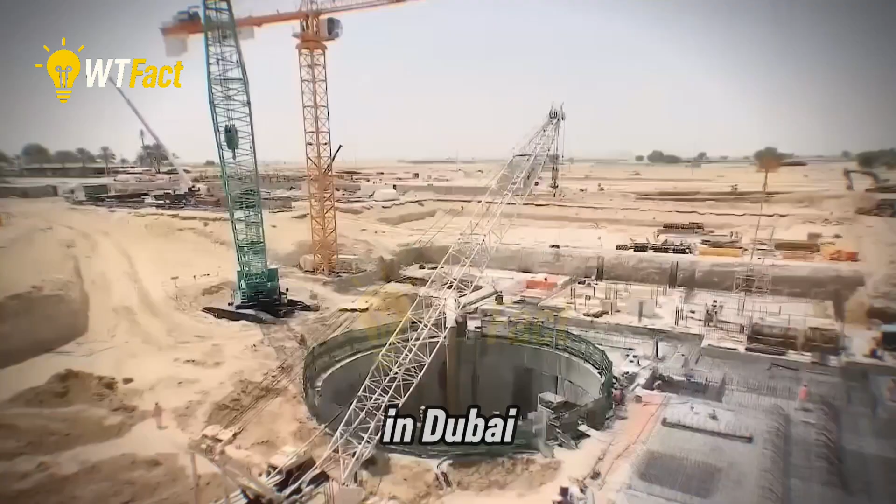During the construction of the world's deepest diving pool in Dubai, when a 45-meter tunnel was being dug into the ground, an unusual problem troubled the engineering team. It was discovered that in Poland, there is a diving pool called Deep Spot, which is open and has a depth of 45 meters.

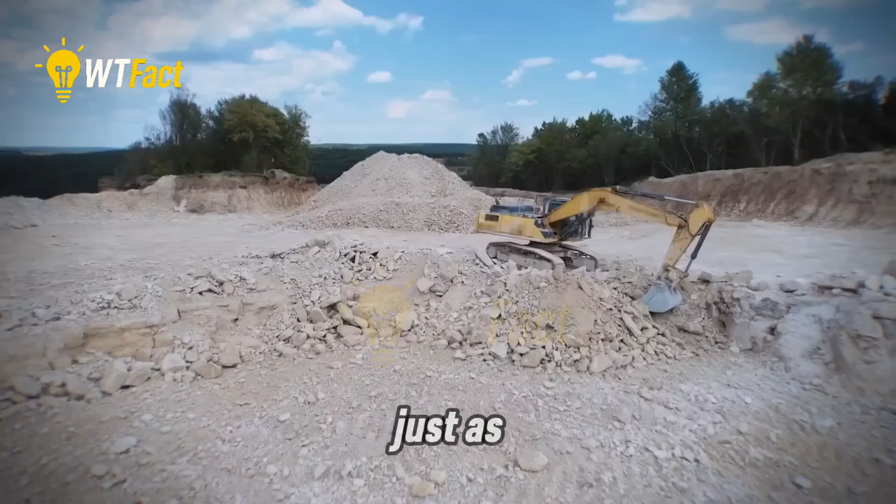Now it is clear that if Dubai wants the world record for the deepest pool, they need to go deeper. Although the project aims to increase its depth from 45 meters to 60 meters, this task presents significant challenges, making it just as difficult to perform as it might initially appear easy.

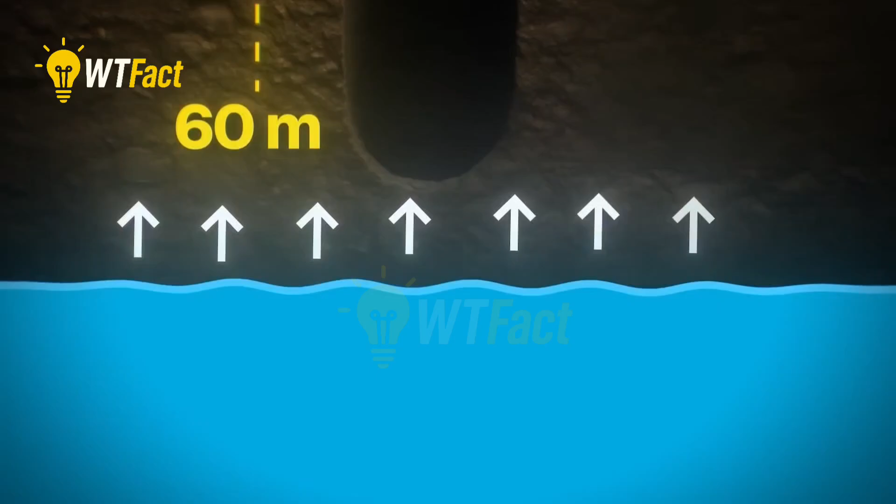Experts have calculated that if the pool's depth is increased to 60 meters, then groundwater pressure has the capability to effortlessly push it upwards. This phenomenon is similar to what happens when a fully filled water bottle is submerged and placed into a pond, causing it to rise.

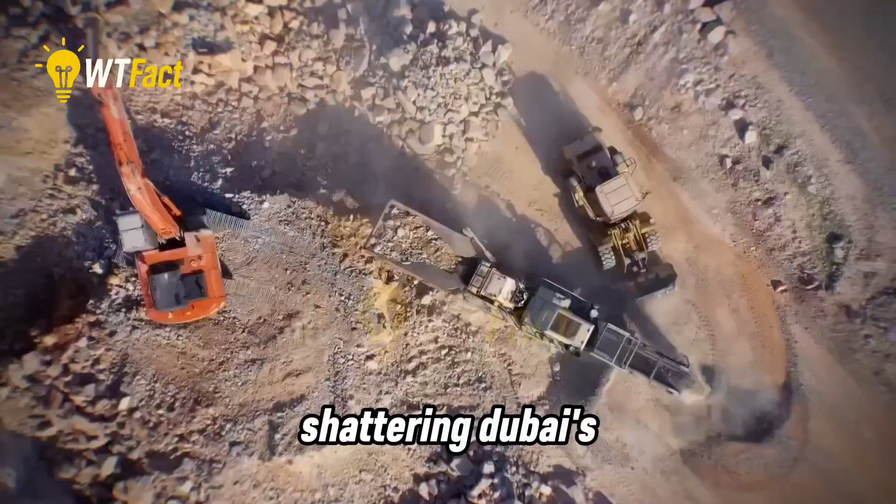The bottle will continue to stay on the pond surface because, as a result of the buoyancy force, the water in the pond exerts an upward push from the bottom, keeping it afloat, meaning the entire pool could rise above the ground at any time, shattering Dubai's dream of building the deepest pool at this point in the construction. But then an idea saved everything.

When it comes to setting world records, the first name that comes to mind is Dubai, with 425 Guinness World Records. It's still number one across the entire Middle East, and it feels like the rulers of Dubai do not want to lose this number at any cost. Another addition has been added to this world record library.

At the request of Dubai's Prince Sheikh Hamdan, the innovative underwater facility was conceived, and the world now recognizes it as Deep Dive Dubai, attracting divers from around the globe. Deep Dive Dubai is not just a pool but a bizarre and intriguing world with a depth of 197 feet or 60 meters. With this extraordinary depth, it is now considered to be the deepest pool in the world, containing approximately 14 million liters of water.

It is as much fluid as is typically found in 6 Olympic-sized swimming pools, or as used by approximately 90,000 individuals in the span of a single day. This elaborate swimming pool is intricately themed like a detailed sunken city, where skilled divers enjoy an immersive experience that was previously hard to even imagine.

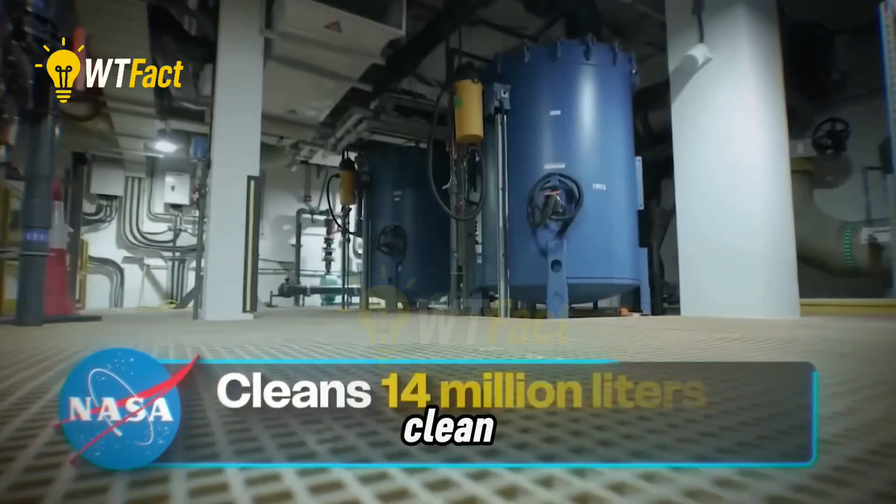With NASA's assistance, a system has been created to keep the pool water clean, which every 6 hours consistently and reliably cleans the entire 14 million liters of water. Whether the outside temperature is 50 degrees Celsius or 20 degrees, the pool water is always meticulously maintained at 30 degrees Celsius to guarantee maximum comfort for divers.

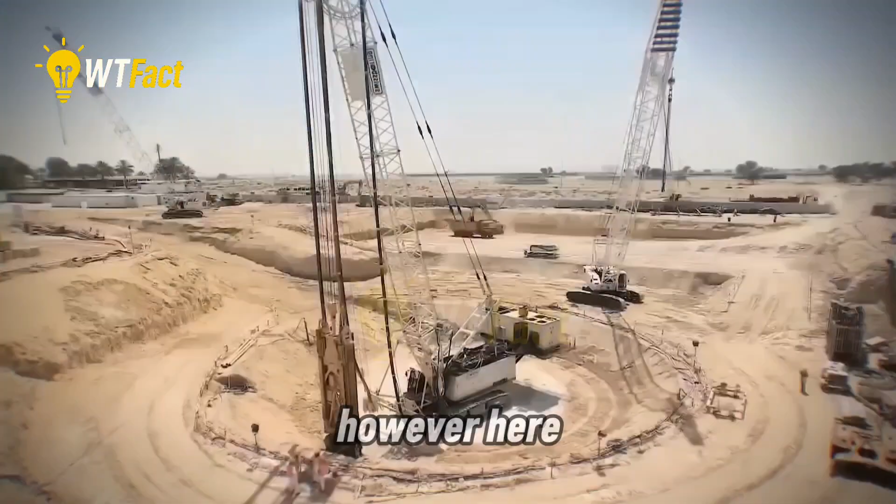However, here at Deep Dive, conditions vary slightly. People are more interested in its construction techniques than its contours, because the engineering community believes that Dubai's deepest pool is no less than a marvel of engineering. During the construction of Deep Dive Dubai, engineers faced various difficulties. Without wasting any time, let's take a detailed look at each of them.

The first major challenge was effective planning and design. Crown Prince Sheikh Hamdan expressed his strong desire for a unique and meaningful design that could effectively reflect a vivid glimpse of Dubai's deep-rooted cultural values.

Before oil and tourism, pearl diving was a major occupation in Dubai. Professional divers dove into the open sea without scuba gear. They diligently collected seashells to extract and subsequently sell beautiful pearls. A large part of Dubai's economy was previously highly dependent on pearl diving.

Keeping this idea in mind, Deep Dive was given the shape of a seashell, a shell that from afar looks like a gracefully curved marine structure, seamlessly combining aesthetic appeal with functional design elements. An open shell lies on the expansive seashore, revealing its intricate and captivating outer facade for all to see. Now the decision was how to build the world's deepest diving pool inside it.

Secondly, Dubai is a very hot city. In the event that the pool is constructed above ground within a building, the surrounding environmental heat could thoroughly envelop the pool's entire atmosphere. The Crown Prince of Dubai wanted to have a pool that not only has a distinctive design but also has a depth that the world would talk about. Thus, it was decided that the world's deepest diving pool would be excavated underground with a shaft in the ground.

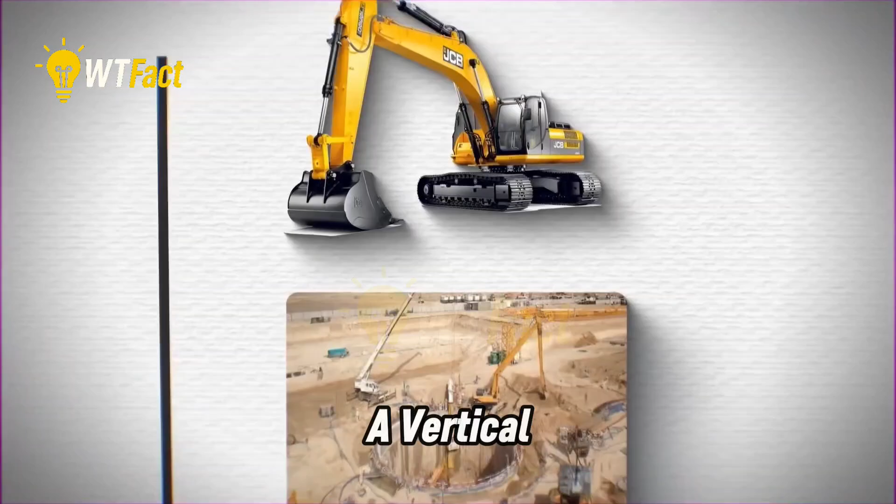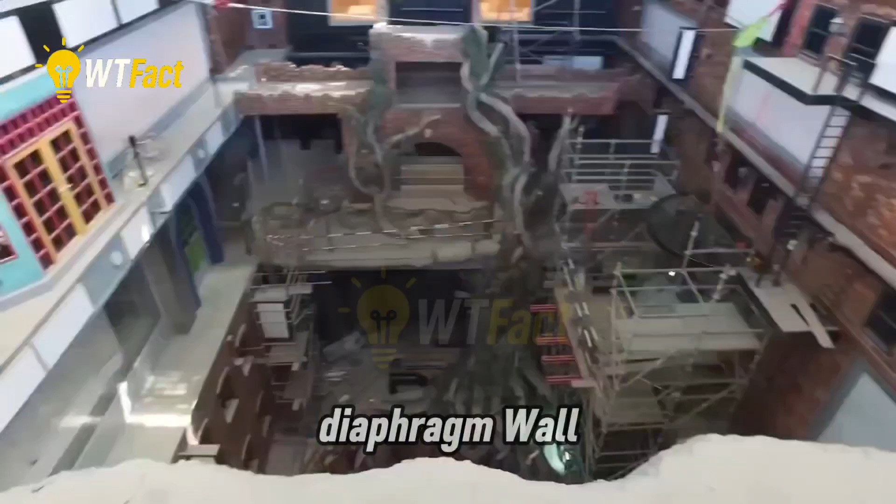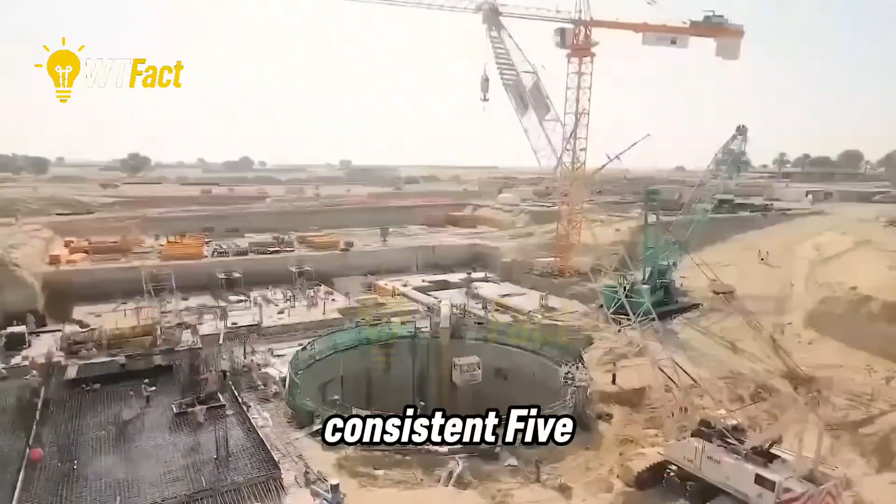A specialized excavator was procured to carry out this work. With the help of the machine, a vertical shaft as tall as a pillar was excavated to a depth of 147 feet. Then, a steel cage was inserted and filled with concrete. Using the same method, the entire diaphragm wall was constructed in small chunks. This entire process took more than 2 months. After that, the excavation work began. The original plan was to carefully excavate the area in consistent 5-meter increments, extending the process up to 45 meters below where the diaphragm wall exists.

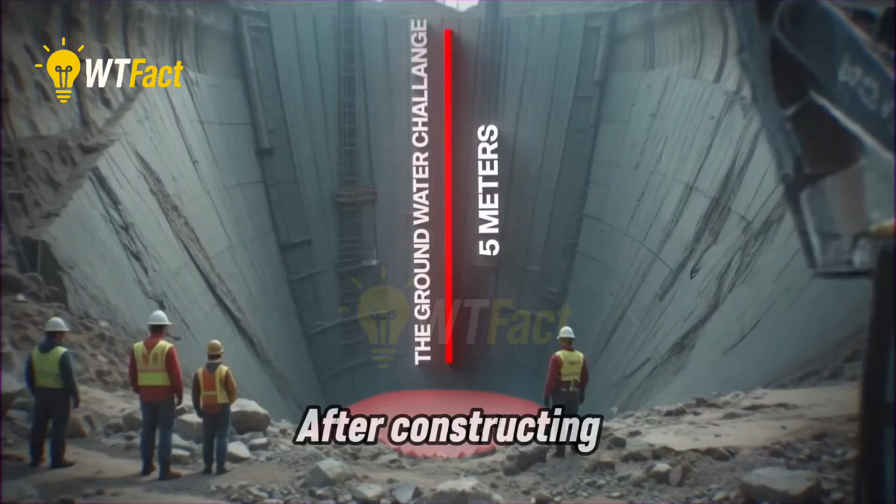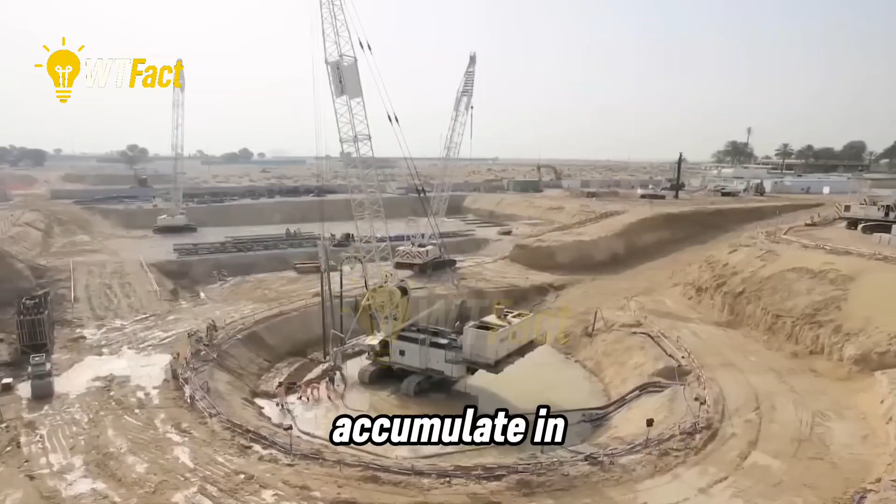However, once they had excavated the initial 5 meters, an entirely new and significant challenge awaited them: managing the persistent groundwater. After constructing the diaphragm wall, when excavation work began, after 5 meters, water started coming out from beneath the ground. Since the diaphragm wall was constructed in separate segments, small gaps were present within the structure as a result. And the groundwater easily flowed out from these gaps and began to accumulate in the middle of the tunnel. It was not possible to continue the excavation work without dealing with it. Pumps were installed to address this issue, which continuously removed water. And along with that, the excavation work continued.

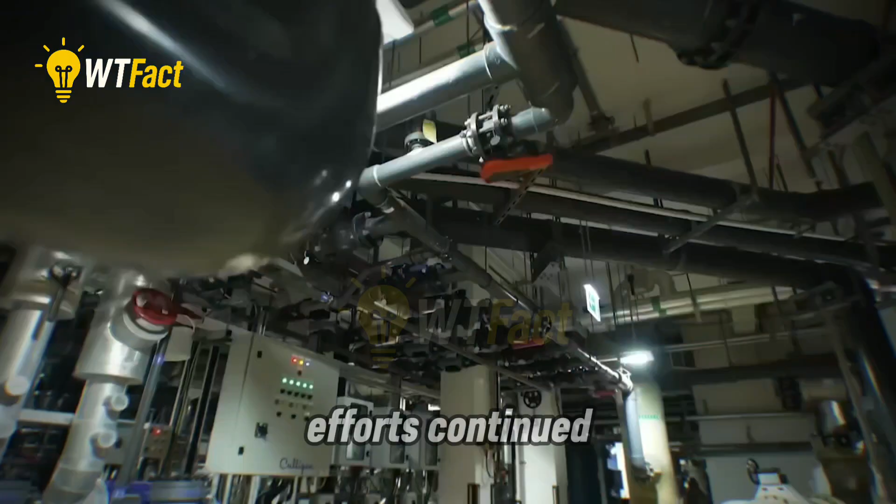Excavation proceeded for the next 2 years, and during this entire period, the pumps also kept running continuously. A total of 45,000 tons of soil, sand and stone debris was removed. After excavation, when the pumps were turned off, water started filling the tunnel again. In this situation, it was necessary to first make the diaphragm wall properly waterproofed. During the next several months, the diaphragm wall was waterproofed. The diaphragm wall, tunnel excavation, and ongoing measures to stop the groundwater took more than a total of 3 years.

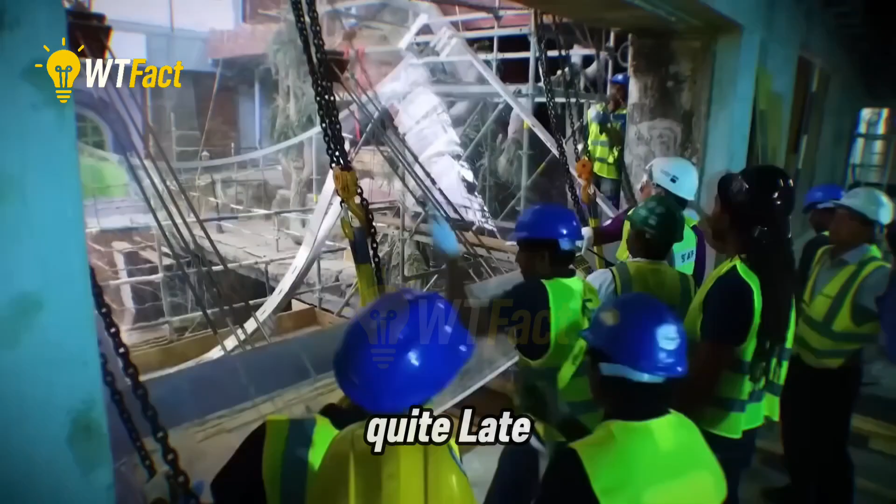Now the engineering team was already quite late. Every single day was incredibly precious, but during this challenging period, a new and unexpected problem arose in the construction process of the deep dive project, a significant change in design. When the diaphragm wall was completed, excavation was done and groundwater was managed, news came that near Warsaw, the capital of Poland, a deep diving pool named Deep Spot had been officially opened, and its maximum depth is 45 meters or 147 feet.

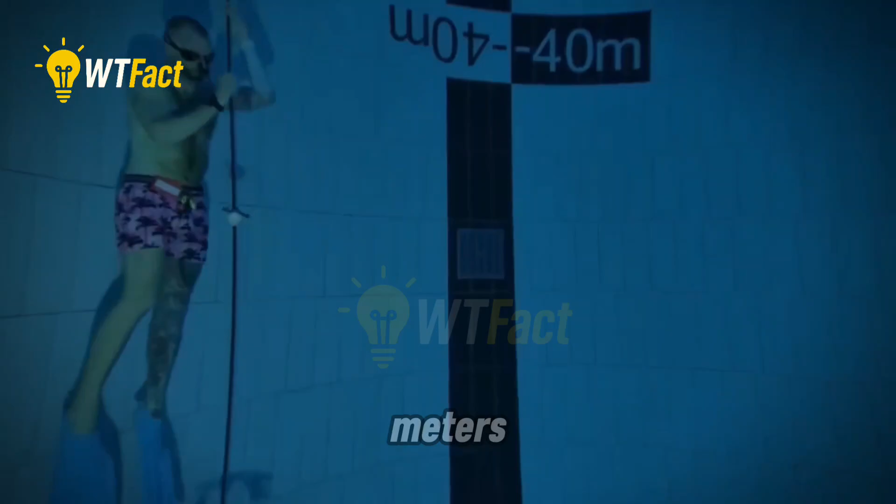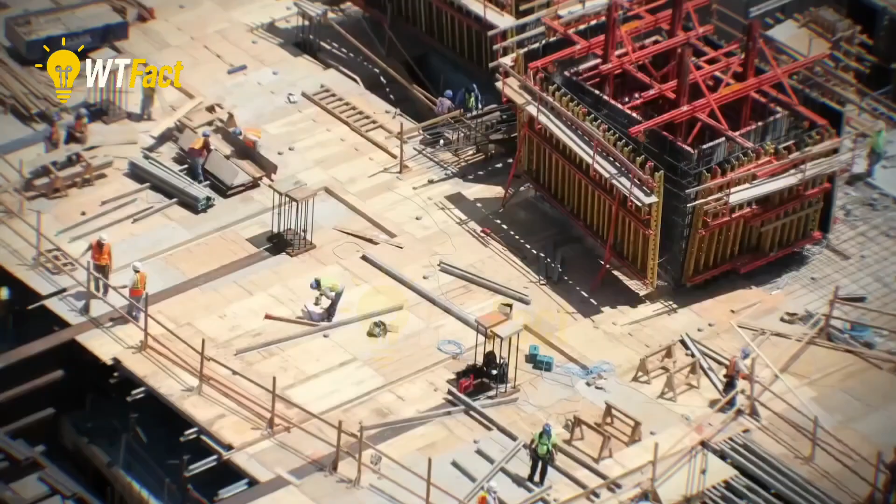This news struck the entire deep dive project team like lightning, because all the effort they had put in so far was undertaken solely to set a record. Normally, in all projects of this kind, most of the details are kept confidential, and something similar happened in this case.

When the Crown Prince of Dubai learned about it, he requested, "We are considering further increasing the depth of the deep dive so that a world record could still be easily set." However, there was a significant and unexpected problem that arose during the meticulous planning phase.

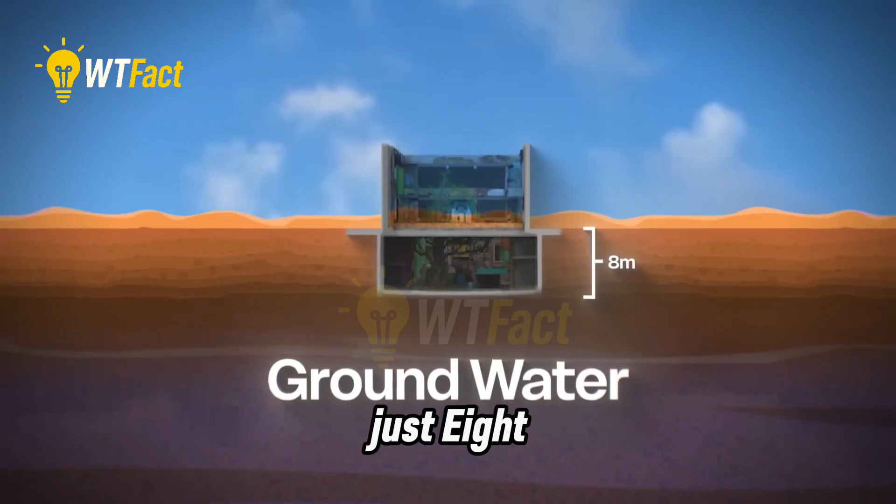Groundwater was present just 8 meters below the surface, and it extended horizontally all the way to a depth of 45 meters. This means the groundwater would push the entire pool from below. This force is also known as buoyancy force. The engineers had already carefully calculated the overall effect of this substantial force acting directly on the water to be filled inside the swimming pool structure. And this calculation was made considering the pool's depth of 45 meters.

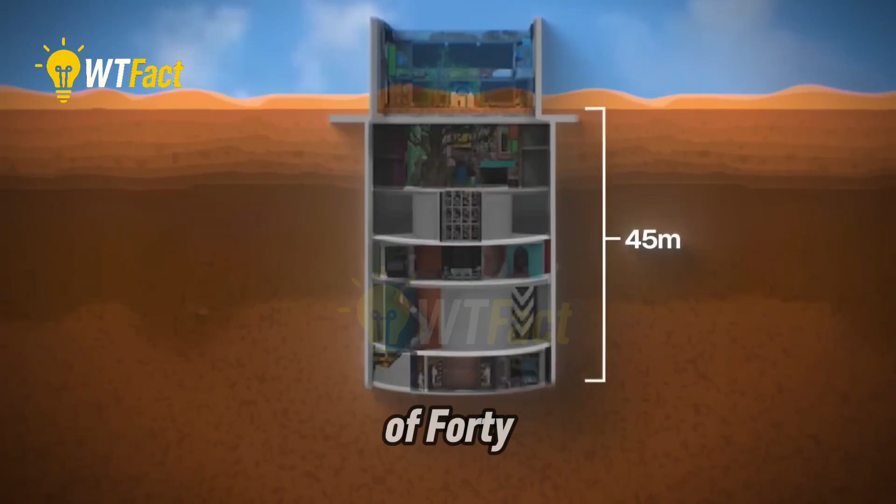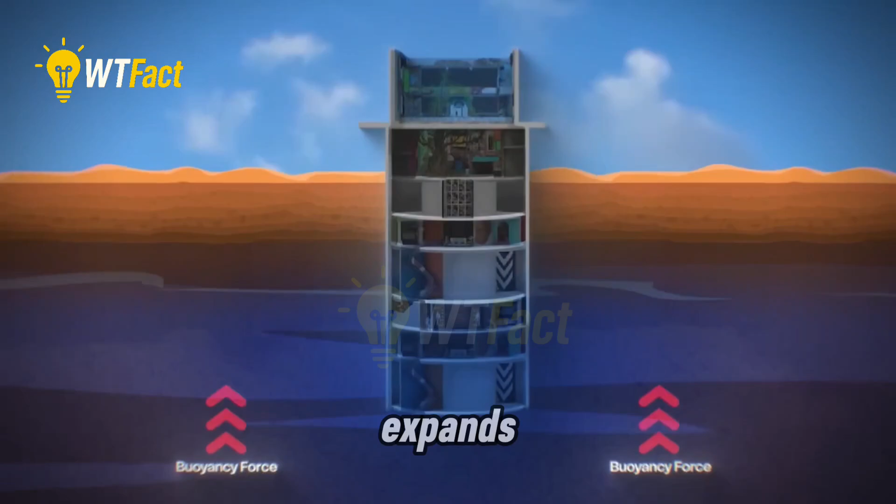But if the depth of the pool is increased by an additional 15 meters, then obviously the buoyancy force will also increase further, and it is possible that the pool would rise above the ground along with the entire diaphragm wall. Due to this issue, the entire construction work had come to a halt. It was extremely crucial to urgently find an effective solution to this challenging problem in the shortest possible time frame.

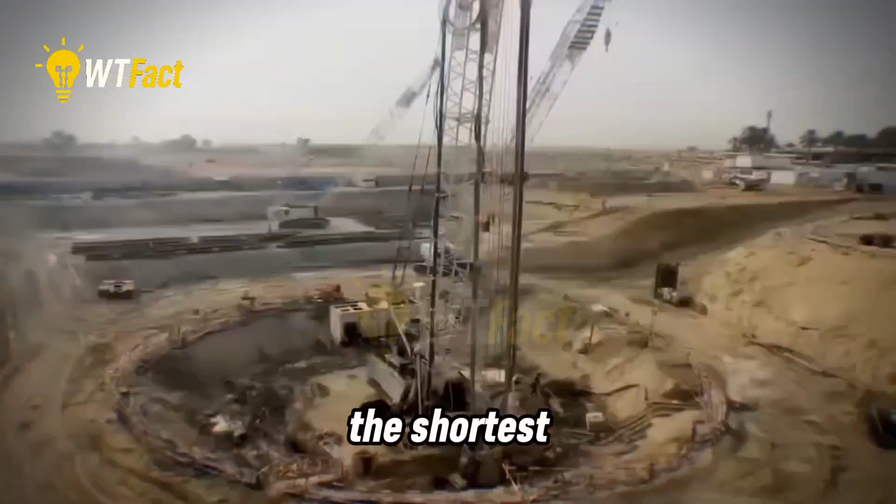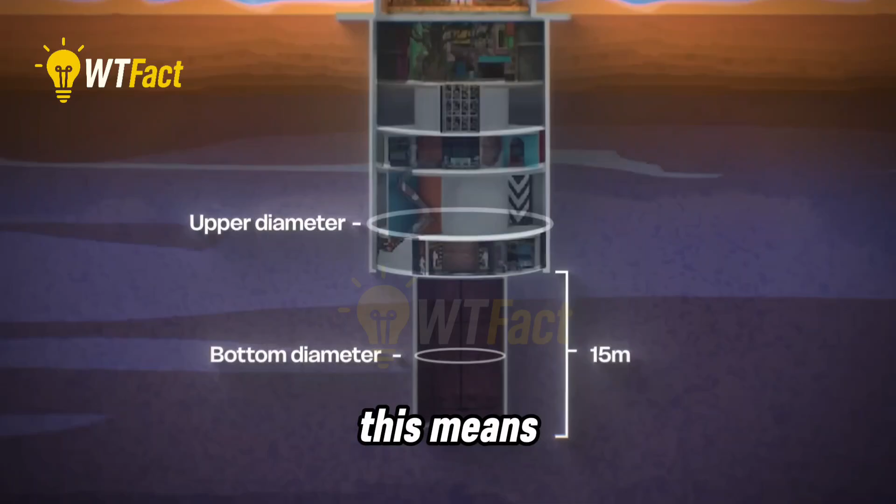After conducting comprehensive and detailed research, a successful solution was eventually discovered. Firstly, there will be an extra 15 meters of excavation in the tunnel, but its diameter will be about half the original 45 meters. This means that the surface area subjected to the buoyancy force will be consequently reduced, thereby decreasing its overall effectiveness within the system.

Secondly, an underreaming base will be constructed beneath the tunnel. Underreaming base is a technique in which beneath the structure's foundation, an anchor-like device is driven into the ground, similar to how an anchor holds an entire ship in place. Similarly, underreaming pulls the entire structure with the ground. In this way, Deep Dive Dubai's depth was extended from 45 meters to 60 meters, making it eligible for inclusion in the Guinness Book once again.

But the issues were still unresolved as the days passed, and the 60-meter tunnel's construction was still significantly delayed by several factors, fraught with danger, because cancelling the buoyancy force was only possible with the water present inside the pool. If the structure is kept empty for an extended duration of time, the entire structure could gradually lift due to the influence of underlying groundwater.

Now it was time to fill it with 14 million litres of water, but the issue was that Dubai's water supply authority can provide only a very limited amount of water. And if the water was filled at this speed, it could take 3 months to fill the pool. In order to expedite the work, more than 100 water tankers were also ordered alongside the continuous supply provided by the Dubai Water Authority. You can estimate the grand scale of deep dive by the fact that, despite all this, it still required a full month to fill the pool.